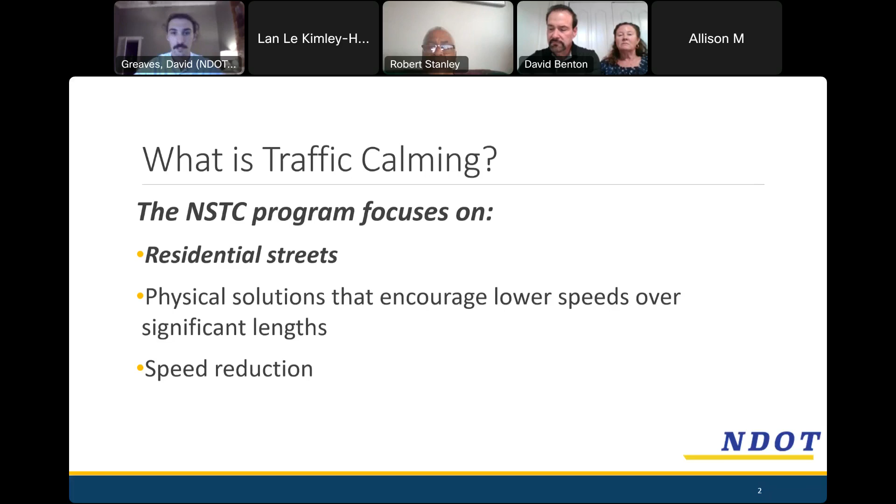The primary goal is speed reduction. There's a few reasons for that - the 3 E's of traffic calming are some of them. We do education - that's like the meeting we're having here now, where we are informing members of the public what traffic calming is and why we do it. There's also enforcement - that's only the jurisdiction of our partners in the police department, so NDOT does not have a lot of tools to do enforcement, but we work closely with the police to help keep speeds low. And what NDOT can do a lot of is engineering.

So primarily that's what we're talking about here tonight. We'll show you the design that we've done. We sort of talked about a concept in meeting 1, and hopefully get any input that anyone might have to offer about what we're proposing.

So like I alluded to earlier, the primary goal of traffic calming is speed reduction. The reason for that is pedestrian fatalities and injuries become much more likely at high speeds. So you can see this infographic over here - at 25 miles an hour, somebody who gets hit has a pretty good chance of surviving, but that tends to go way down once speeds creep up above 35 and 45 miles an hour.

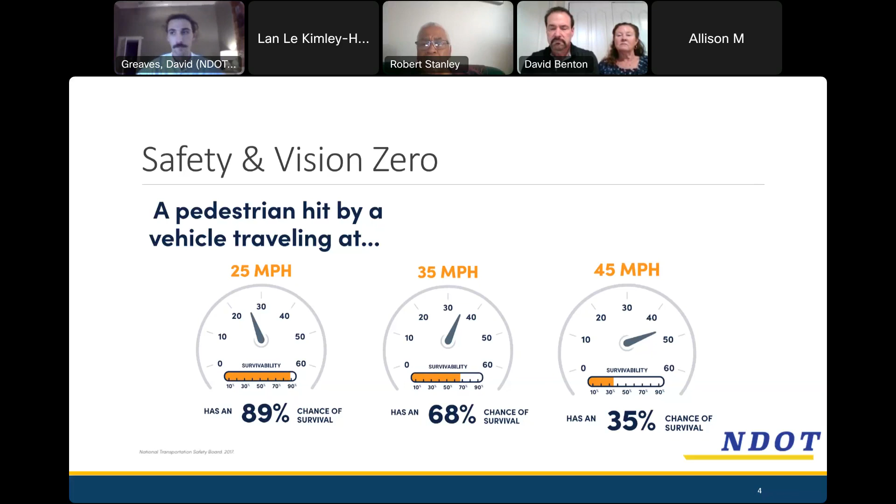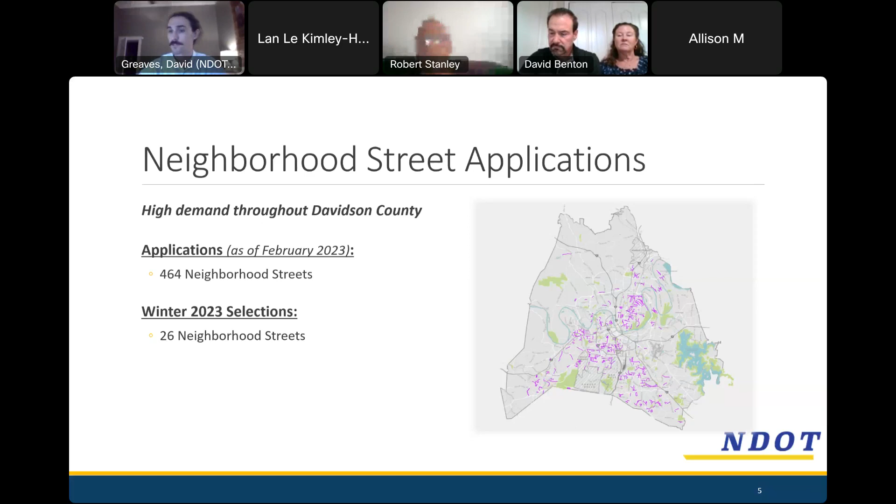So this is a program that's in high demand. We kind of show this slide to just emphasize that a lot of neighborhoods in Nashville could use some traffic calming - over, I think the number is now north of 500 streets have applied. And in the winter 2023 selection period, Ransom Place was one of 26. So we're very happy to be able to be addressing the problems on your street, but it is also underscoring that you all really do need it - we noticed some pretty serious speeds and volumes on Ransom Place.

So that's a little bit about what traffic calming is. There's a lot of things that traffic calming isn't - for sidewalks, really any problems with the right of way, potholes, down trees, just about anything can be routed through Hub Nashville. They have a phone number, that's 311. I find the app is easiest to use - they've got a pretty good interface that will get you connected with whoever in Metro can help solve a problem. So just want to make sure everyone is aware of that resource.

It's very helpful. So this is Ransom Place - need to go back just here.

So this is a map of Ransom Place. This is actually a screenshot from NDOT's traffic calming tracker. Green means you've been selected, but nothing has been installed yet. Purple means you've applied, but have not been selected. So you've got a couple other streets in your neck of the woods that have asked for traffic calming, and hopefully in future cycles we'll select them and ultimately put them in.

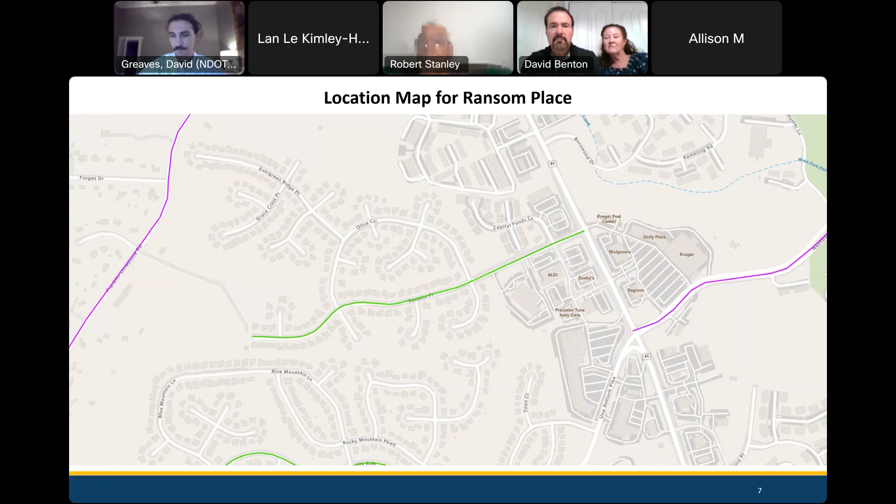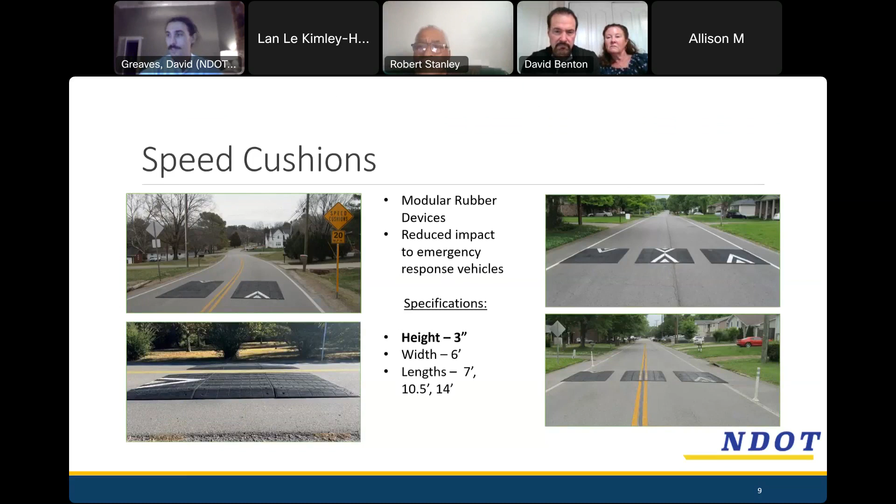So in meeting one, we talked about a lot of different traffic calming measures that might be chosen that are in the toolkit. Today, we're just going to focus on the ones that we have analyzed as being the most appropriate for this street, and unsurprisingly, that is speed cushions. Many people who are familiar with the program know that these are pretty much the default measure for traffic calming in Nashville. There's a few reasons for that. They're very uniform, quick to install, and most importantly, we found that they just really do work.

So we can see that the vertical measures, as NDOT has observed with some limited studies they've done, show a pretty significant decrease in speed, both in the average and the 85th percentile, which is a statistical measure that helps to isolate the higher speed vehicles and really zero in on those.

I guess that would be a good time to just stop, pause for questions. Does anyone want more information about what we reviewed, or have questions that aren't specific to the Ransom Place design? I got some things in the chat.

So I'm just kind of wondering where this data was, like how we collected it, when it was collected, stuff like that. Yeah, that's a great question. So what NDOT will do is place, well, they have a traffic counting consultant that will take counts. Those are like tubes in the road, so people drive over them, and then they also measure the speed for a period of time.

These would have been measured in the 6-month period after the application. So I don't remember off the top of my head if Ransom applied immediately before being selected, but they were in the queue for a couple of years, at least 2 years. So I suspect that the counts would have been done for Ransom Place roughly after that—maybe about 1.5 years ago or so.

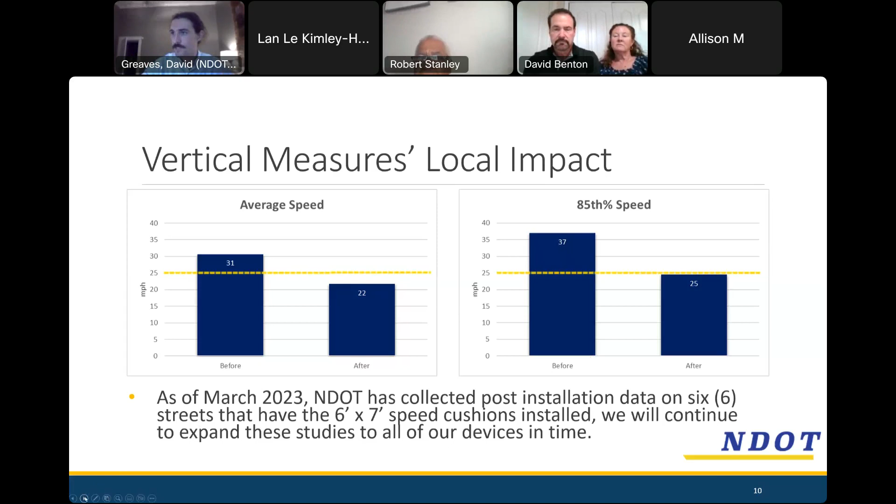All right, I'll go ahead and move on. So last time we were together, we presented a concept plan that looked kind of like this. These are the design plans, so we'll hand these off to the contractor, and this is what they'll build. As an overview, we're proposing 3 sets of cushions.

One was specifically requested down here because it is the straightest and widest portion of the road. We got reports from neighbors that people were using it as a true drag strip. We usually shoot for a spacing between 400 and 600 feet. That's a recommendation developed by the Federal Highway Administration, and NDOT has found it generally works well for most neighborhoods.

There used to be another cushion proposed up here. That was actually eliminated from the design because we heard feedback that neighbors weren't particularly worried about this section, and the volumes were really low—basically just the few people on Elderberry Court in these houses. So really the cut-through traffic is what we're generally focused on.

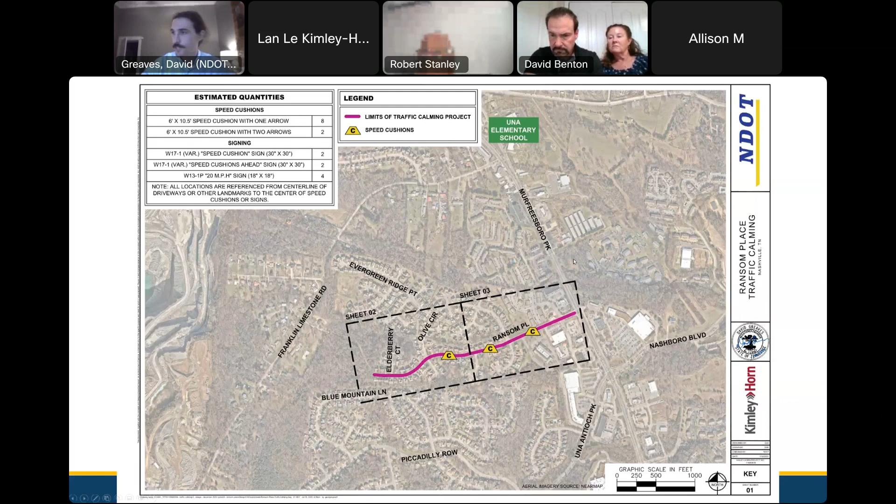The next few pages are just more details, showing exactly where we're proposing to place them. Take note that we've got the addresses of the houses nearby, so if you have a question about how close it is to your driveway, we can dig in. Feel free to raise your hand or speak up if you have a particular question.

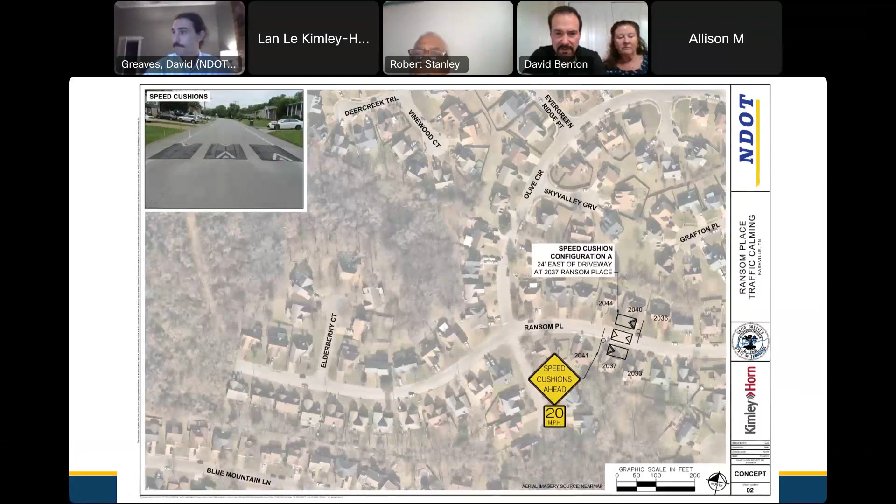Where's the middle one, that second one—where's that located? This middle one is 35 feet east of the driveway at 2013 Ransom Place.

It's probably clear to everyone, but these are not actual size—they'll be much smaller and won't overlap anyone's driveway or anything like that. In general, we can't always do this, but we try to find the edges of property lines. We don't like to place these directly in front of someone's house if it can be avoided. Thankfully here, we were able to split the difference and not get too heavily into anyone's way.

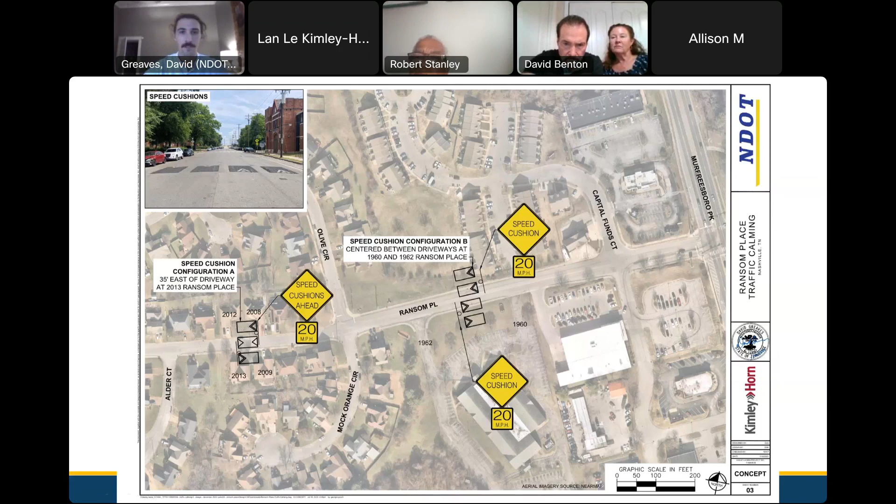You'll notice down here we actually have not 3 cushions like we do elsewhere, but 4. That's because Ransom Place widens out quite a bit as it approaches Murfreesboro Pike. So we've taken measures to make sure people won't have the ability to drive around the cushions, which we sometimes see if people are given the opportunity.

These are just details—this is what it would look like if you were directly above the cushions. Nothing too tricky to get into here. Sometimes there's more to talk about, but this is a pretty standard configuration that we use for these cushions. Happy to answer any questions, but I don't assume this would come as a huge surprise to anyone.

Yeah, it is a surprise to me that they're 10 feet long. Yeah, it sounds like a lot when you're thinking on the human scale. But the 3 options for speed cushions are 7 feet—that's just 2 units—10.5 feet, and 14 feet. 14 is usually reserved for roads that are collectors and maybe have a 30-mile-an-hour speed limit. 10.5 is what we use when it's a local road and we're generally shooting for lower speeds.

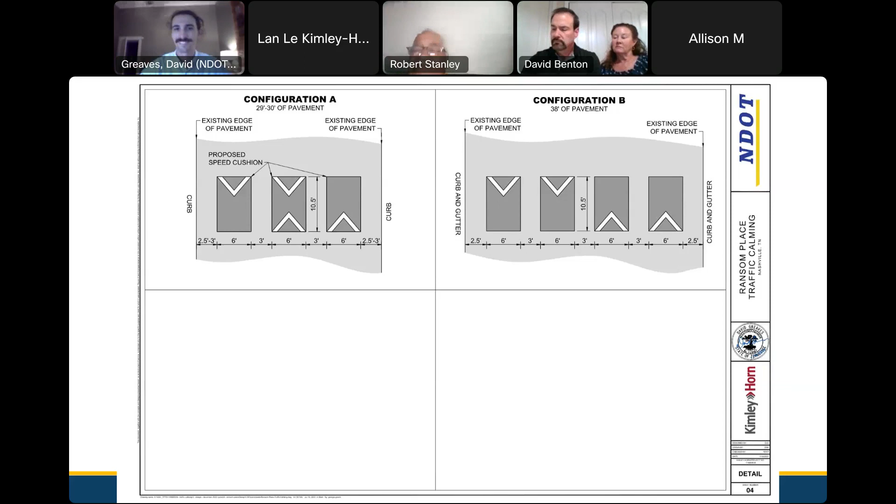Well, good. So that's it on the design. Any other feedback, questions? Happy to backtrack and look at anything closer, or if not, we can move on.

You mentioned about enforcement—do you have help from Metro, from the police? Can we do anything to facilitate that as an HOA? I think Hub Nashville is probably the best way. We don't have, through NDOT, any conduit to request speed enforcement. They are unfortunately stretched pretty thin, so oftentimes there isn't staff to visit neighborhoods and set speed traps and things like that, which is where we like to come in and put in permanent solutions that physically slow down cars.

Cool, so we'll go over this flow chart—you all probably remember some of this. The application is how you get into the program. There actually is an application open now; I believe it closes in a couple weeks. Feel free to reach out to any friends or others who might be experiencing speeding and may not know what to do about it. There is an open opportunity to apply to be in the next cycle.

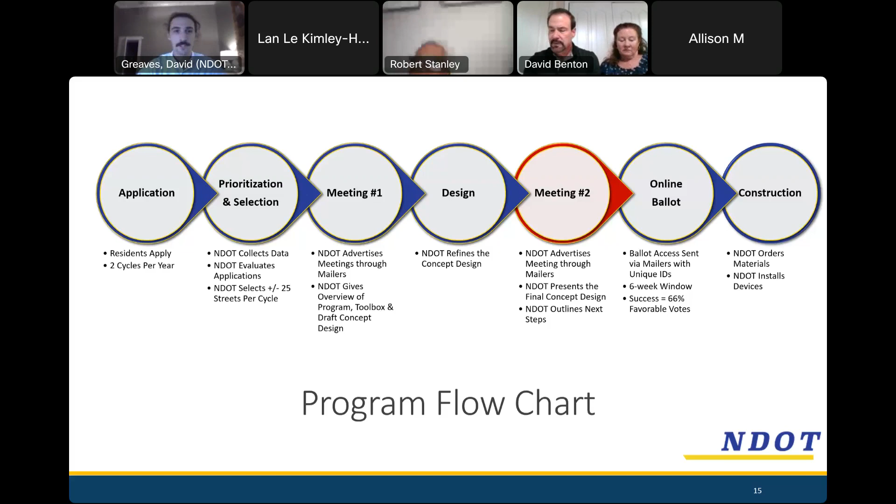It'll be successful if 66% of the people who vote are in favor. So if we get 3 votes and 2 of them are yes, the project moves forward. If 4 people vote and 2 vote no, then it's a no. So it doesn't depend on getting enough of the neighbors to vote as it has previously. It's purely a measure of the percentage of people who do vote, just like regular elections.

Dave? Yeah, I think they've adjusted the success vote threshold to 60%. Don't hold me to that, I'm going by memory from my meeting yesterday, but I think that's what Diana said at NDOT. Oh, interesting, they may have just dropped that threshold a little lower. Yeah, that's certainly news to me. It may apply to the next round of selections. It gets a little tricky, because in a neighborhood less enthused about such things, some people get pretty sensitive about changing the rules on them.

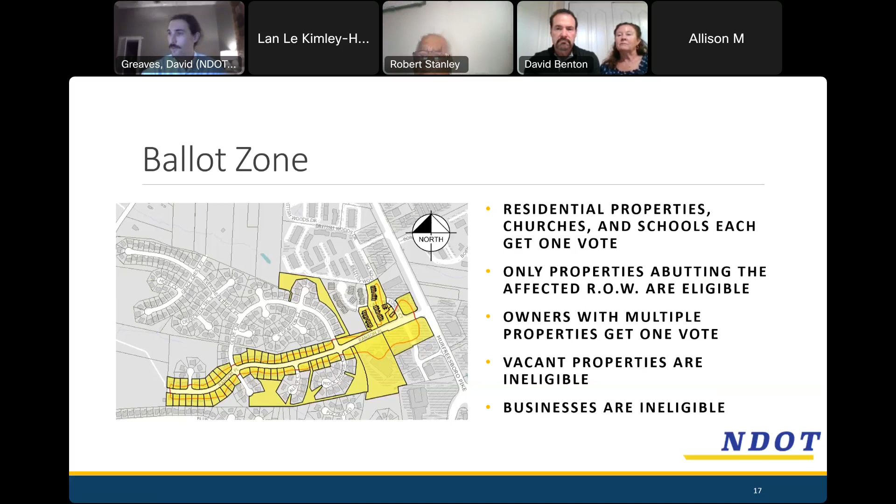Next steps—this will be kind of vague in terms of timelines, but basically after the postcards get sent out, which will be in the next week or so, we'll have the ballot open for a period of 6 weeks. We'll have the date ballots are due on that postcard, so you know when you need to vote. It's been requested that we give the HOA a heads up when we send the ballots. I'm happy to do that, so look for an email from me, and we'll hope it gets passed around.

Then NDOT will order the materials and eventually install the cushions. There's quite a backlog in projects—we've been very busy catching up with the program, everything that we've designed. So it won't be immediate, but should the ballot be successful, NDOT will begin the process of getting these installed.